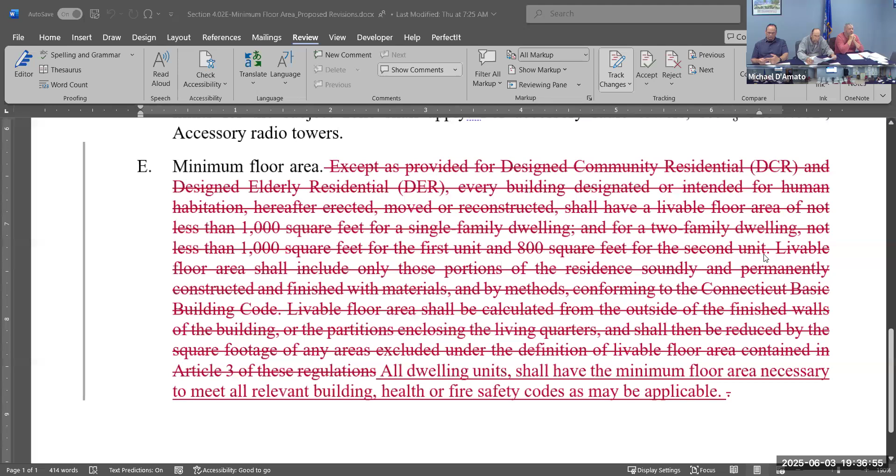We can always cap how big something is, so you can certainly say you can't build a house in a certain zone, or in all residential zones, that exceeds a certain size. You can cap it at 2,000 or whatever, but you can't set a minimum.

Okay, so this one is fairly straightforward, and we've talked about it a couple of different times. So this is just receipt, we will then have to schedule the hearing, I have to do the CROG referral and all that, so it'll be a 30-day notice. That's exactly what we talked about. Anything else on that? Not on this one, that's all it is.

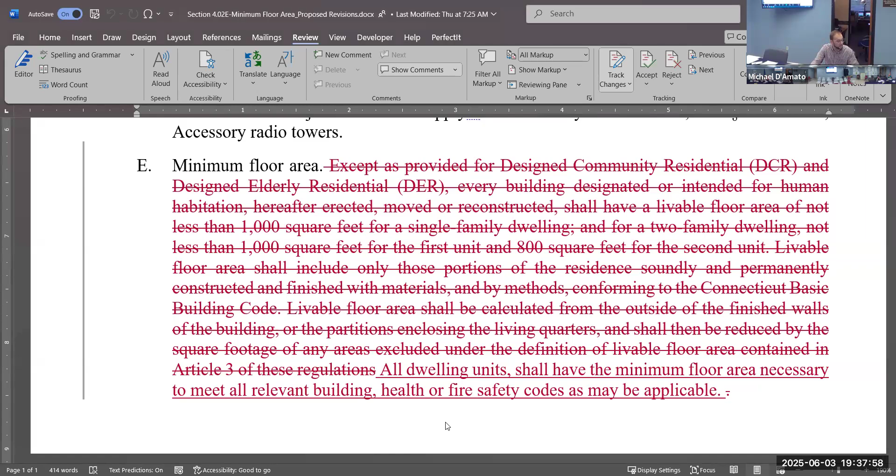Driveway standards? Yep, let me pull that one up. Switch, hopefully it will switch. Because it's Word.

So for this one, this is more just in practice and a little bit of a cleanup, but we've had a couple of these come up and we've talked about this as part of the codification.

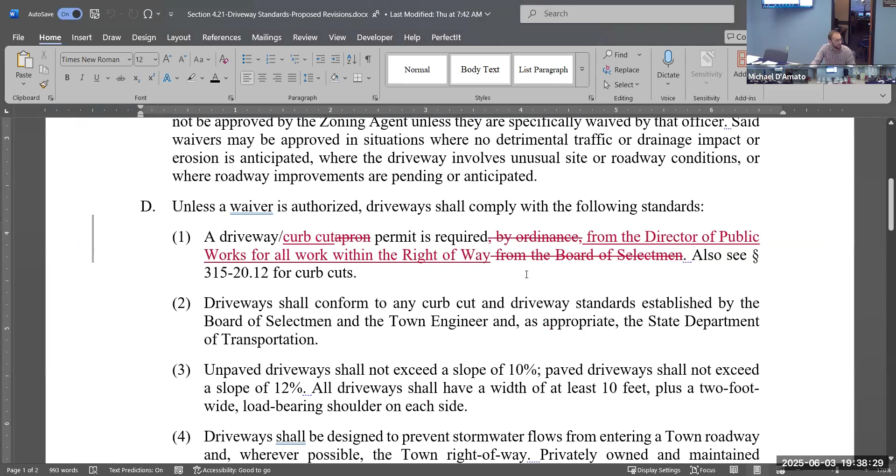The current language says a driveway apron permit is required by ordinance from the Board of Selectmen. So we have reference to this ordinance, a driveway ordinance established by the Board of Selectmen. There is no ordinance or set of standards adopted by the Board of Selectmen that says you have to have these requirements, it has to be this wide, it can't be wider than this, you can only have one. At least not that I've been able to find or come up with.

So, and in practice, what we do is it gets referred to Troy, he's the Director of Public Works.

He reviews it, we process those permits in our office, we require a bond for anybody cutting the road. So this is just fixing the terminology, removing the ordinance language, referencing that the Director of Public Works looks at those.

And then maintains the reference to the section of the zoning regulations pertaining to curb cuts with the new number. But there is no separate set of design standards that was adopted by ordinance, or one that's currently in place. So that's the first section.

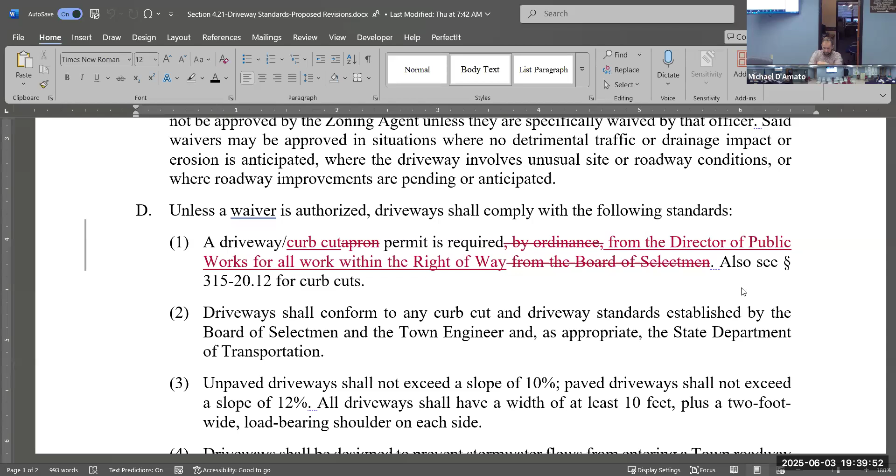Number 4 currently says culverts 15 inches in diameter at a minimum shall be used when crossing town drainage ways. I'm removing this because if it's a town drainage in the right of way, that's something Public Works would be involved with since it's town property. If it's not, there's generally an easement, but I don't like language that says across the board you have to have 15 inches. There may be situations when 15 inches isn't appropriate, maybe bigger, maybe smaller.

That drainage is part of the review process for the site plan. It's something Troy looks at if they're installing something, if it's part of a subdivision that all comes before the commission as part of the overall drainage for the site. So having a blanket statement that in every case you need this 15-inch diameter didn't seem necessary, so while reading through it, I thought it's something we could strike.

This next standard currently says driveway shall have an area with a slope no greater than 4% at the intersection with the street, wanting cars to be flat and level when pulling out of the driveway, for visibility, and to extend at least one car length from the street.

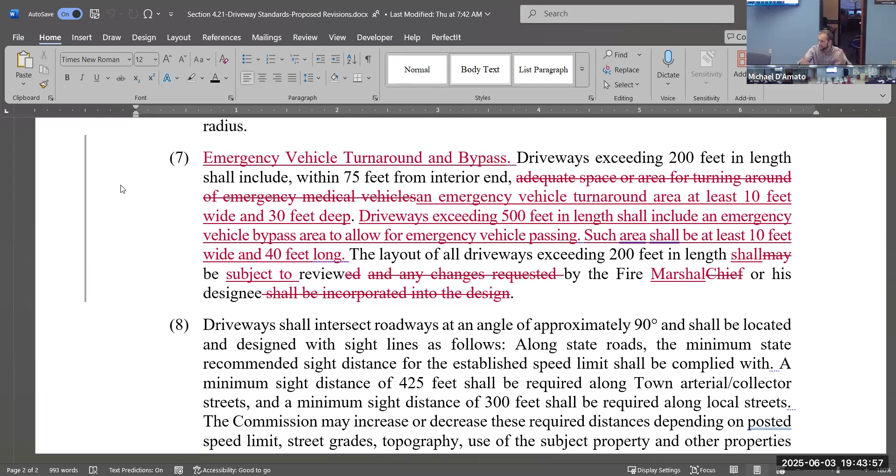The layout of all driveways exceeding 200 feet in length shall be subject to review by the fire marshal. Previously it said 'may' and it was the fire chief. The plan review responsibility we currently have for commercial buildings, commercial kitchens, and all those types of things falls to the fire marshal. The fire chief doesn't really have enforcement stuff and isn't part of that process, so I think that's a more appropriate term.

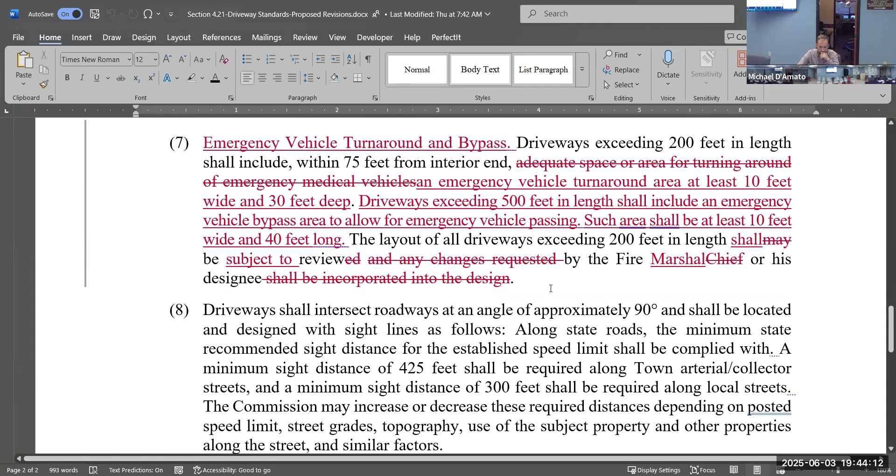And I think Trevor can pull in the fire chief if they needed to, but those are my suggested amendments to that section.

What would be the reason to have a minimum culvert diameter in the regulations, just so people didn't put 5 little 6-inch pipes which clog up right away and become the town's problem? Is 15 sort of a standard that keeps most debris out, reducing clogs and stuff? Somebody must have put it in there for a reason, an engineer at one point maybe had that put in.

They could have suggested it, that it's generally adequate, but now when you're talking about stormwater, no matter how much or how little, it's always about whether the pipe is sized correctly for whatever needs to be conveyed through it. Right.

The goal is not to remove the obligation for there to be driveway drainage, just that when driveway drainage is necessary or proposed, we evaluate the circumstance and the solution to make sure it makes sense. So it may be that 90% of the time, what works and what is recommended by the town engineer is a 15-inch. That's true, the town engineer is looking at this. Right, it's not just... and if it's a water course or any other type of wetland or something related to that, that's completely done, a whole other thing.

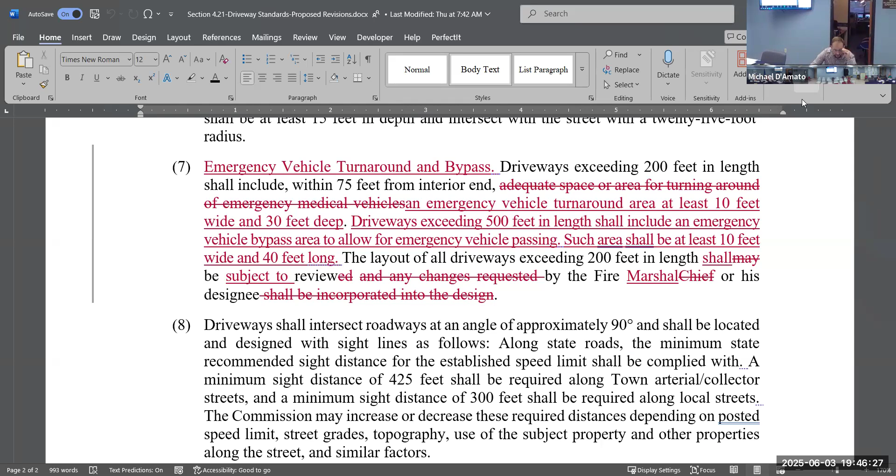And I think since we're looking at this... Yeah, the other thing that was in here, we did this for... what's the last name? I think it's Terry Eccles. She's got the house on Tolland Turnpike, she's a dentist, so she has a small crossing within the driveway.

Not because it's related to town drainage, but we had to make sure it was constructed and the builder understood, like, this driveway is long, so that means fire trucks and all kinds of other things need to not collapse this pipe. So we had to do a more in-depth review, because the bigger the pipe, the more you have to worry about. Yeah, it has to be, what, twice the invert or something, just don't wanna just dig a hole and bury it, there's a standard for that.

Right, so I mean, we can certainly leave it in there. I was just going through this section and I thought, you know, one size fits all is never how we want to do zoning, but it's not necessarily broken, so if you prefer to leave it, we can certainly leave it.

No, I just wanted to talk that through, and of course it would be reviewed by somebody, not just the builder who would be trying to do it with the least amount of expense on his part. Correct, somebody would review it. Yeah, bigger pipes have more fill.

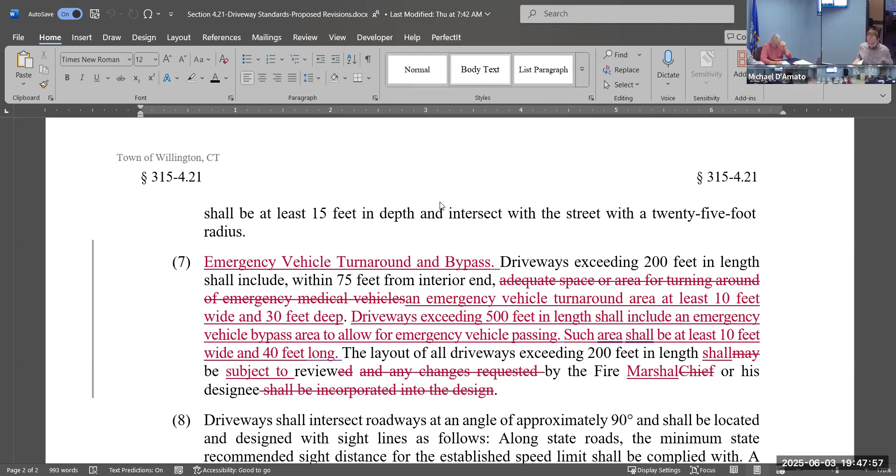Hey Mike, just number 10, the last sentence, references fire chief. We'll change that.

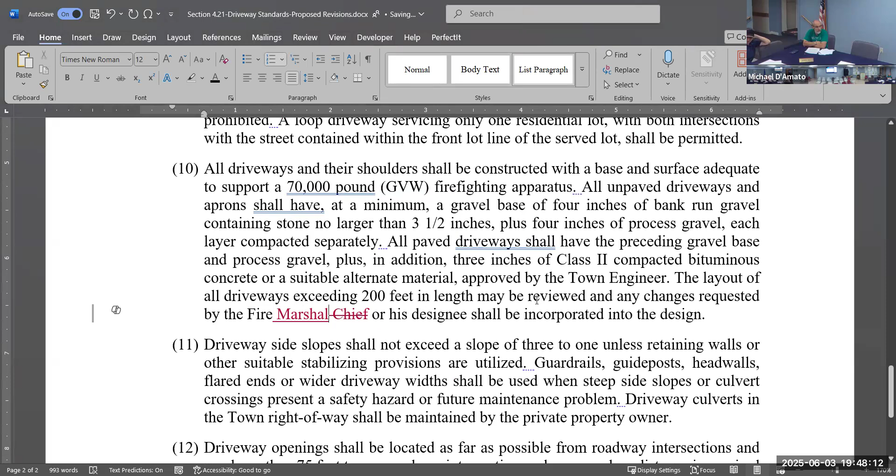I think we already have the other one that's kind of big, but I think we've already got it.

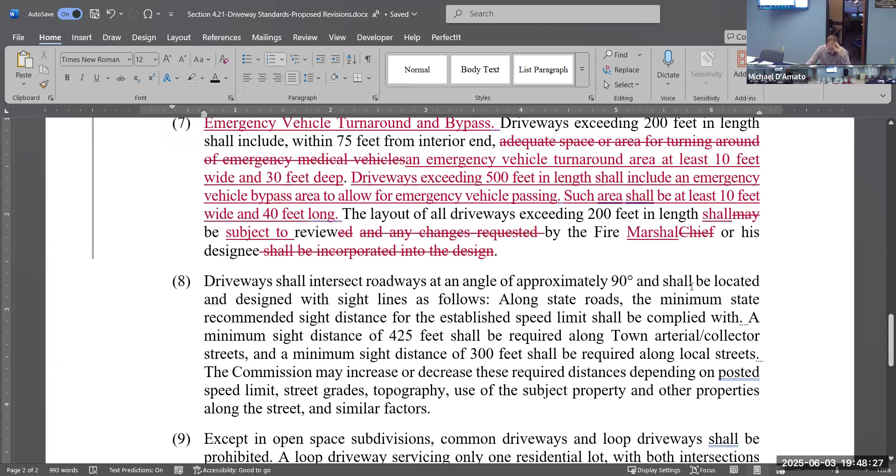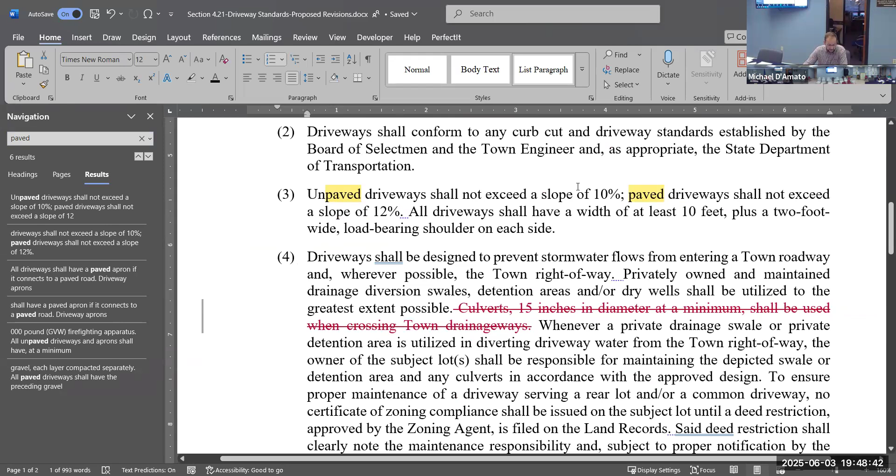Yeah, the other one that comes up a lot, that is sometimes a concern when driveways are reviewed, either from an engineer or emergency personnel, is this idea of at what point does a driveway need to be paved. So we have language in there for that, which I just lost.

Get it again. Here it is, unpaved shall not exceed 10. Those are town standards as well. What do you mean, is that what our public works does? If the grade's more than 12%, 10%, they pave it usually.

I think that's... but only because I don't know, at least since I've been here, that there have been any roads converted from dirt to paved. Like, no, I'm just saying most of the ones like Glen Eldridge Road, both of those steeper slopes have been paved to prevent erosion.

And I wonder if that's sort of a general standard for all roads. It certainly would make sense from an erosion standpoint, but also from a maintenance and access standpoint, and all those things.

So those are the three things that I had on my mind, and we already had that one, so we haven't had any issues with it, nothing has come up. I've been implementing these other things in practice, because if we get a long driveway, I've been asking for the engineer to amend the plans, just because I think it's needed, and if Trevor agrees, it gives that provision anyway. I just think it's better for them to know, so that when they design the site, it comes in with it.

So again, I'm including both of these as single applications, so this would be part of the referral. So that would be scheduled. If we met the deadlines, I don't know if we could get it in, so it would be the July meeting most likely. So I have to give them 30 days.

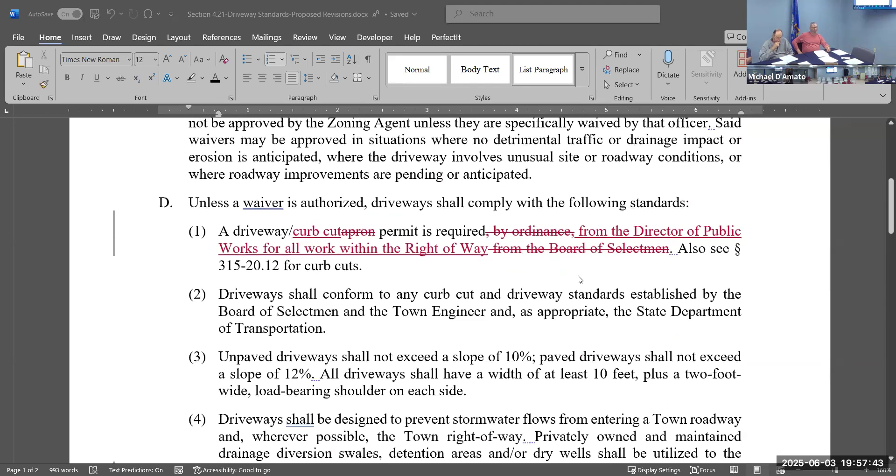Well, all right. One. Each time you come.

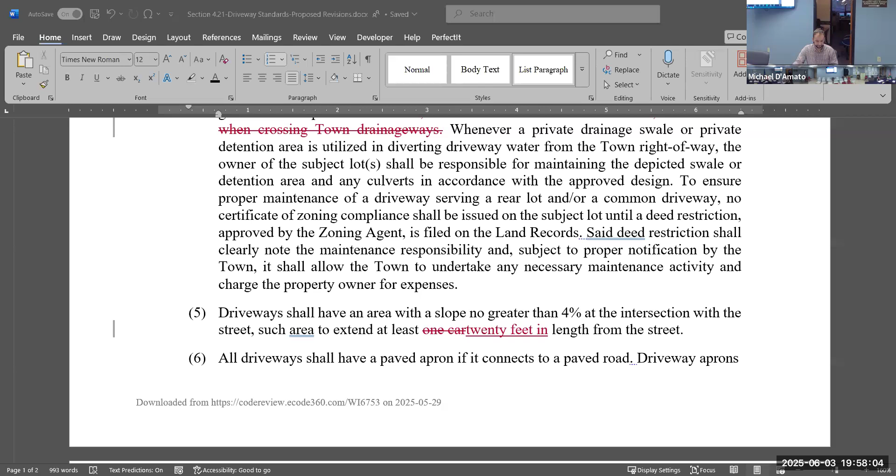What's the difference between asking for a variance and a zoning agent appeal? A variance is: setback is 25 and I want to be at 20. An appeal is the ZEO sent me a decision, a violation letter, and he was wrong. Or he denied my permit and he was wrong.

So this is the subdivision fee. I'm proposing again to tweak this and set it up so it would be a base fee of $350. And then an inspection fee, which remains the same, is if our town engineer has to go out and do inspections for things that are installed, anytime there's an inspection. But rather than say a subdivision application shall pay a base fee of $250, which is intended to cover this, and then a fee of $85 for every 100 feet or part thereof of new road, $55 for every 100 feet part thereof for public right of way...

I'm suggesting basically eliminating that, again, because you can't make bigger applications pay more simply because they're bigger, and just setting a flat fee at $350. So that would be for the application.

Right, so subdivisions don't require hearings, you can choose to have one, unless it's a re-subdivision and then you have to have one. But a basic subdivision would not have hearings, so we would not have the $300 cost associated with noticing the hearing. I suppose that if the commission wanted to, based on section E, if you had a subdivision application and chose to hold a hearing, we could assess the applicant that charge separately for the public hearing if you held one, rather than trying to bake it into the application.

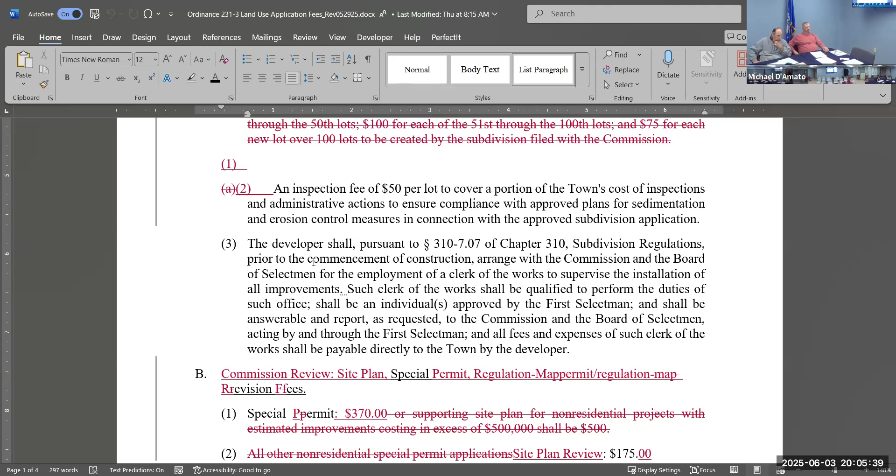For Love's, we had the third party under the wetlands app, which was like $10,000, and they paid it. Then when it got to you guys, I sent it to Joe Dillon for review as our engineer. Right, and he billed the town for whatever those hours are, and that's part of his budget, and it's never much. The hourly rate they charge is fairly reasonable, and he's been in Willington enough that he's familiar. Sure, but yeah, it would -- well, let me.

I'm comfortable with it, they'll be one of the ones to review it, probably speak to it. We certainly talked about it before.

Yeah, so these are the numbers I remember. I think getting rid of all those small ones, and anything that's complicated where it says we have to divide it by the length of the driveway, that's going to create hassles and it's less clear, and it doesn't necessarily require more review. The three-lot subdivision with a ton of change in topography, bringing in a lot of soil and bringing it out, is going to be a lot more complicated to review than a ten-lot subdivision in an old farm field that's flat. So, just simplify, but also not try to pull out a pound of flesh.

I mean, something's gonna happen here. We've seen a lot of parcels getting opened up, getting sold and moved, some fairly good sized chunks of land, so somebody's gonna do something. Yeah, I think eventually it'll be a challenge. Put those hats back on, you'll dust them off.